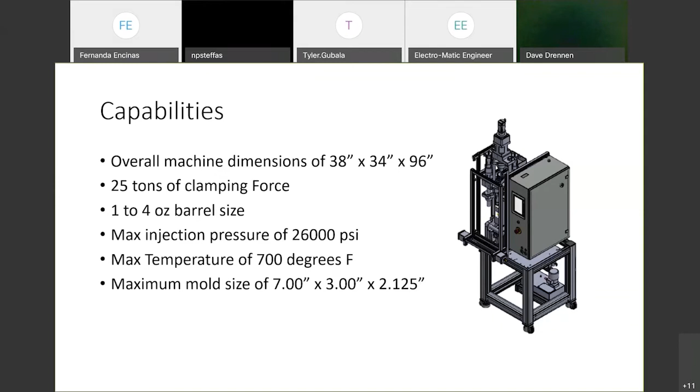So inside the Model 55E, it is controlled by a Siemens S7 1500 PLC with a TP900 comfort panel. It also has 4 S210 drives and then also 4 S1 FK2 servo motors, which drive all 4 axes of the machine.

So that's a good little explanation of our Model 55E injection molding machine. And if you have any other questions, you can feel free to reach out to me here at Electro Matic. And now I'm going to hand it back to Dave.

So, the idea of virtual commissioning, how it's used, it uses software to evaluate the machine function by virtual simulation of all levels, typically without hardware, and that's the goal.

There are several levels that need to be simulated in order to create the digital twin of the machine. First, we need a way to simulate the PLC controller. We also need a way to simulate the HMI or operator interface. And we need to simulate the interaction between the PLC controller and the mechatronics of the machine.

Once you have these simulation capabilities in place, you can realize the benefits of virtual commissioning. Now, some of the core benefits would be to lower the risk of real commissioning by eliminating errors virtually. Most machine commissioning is done with the trial and error method, in which case leads to broken parts and other costly damages. And it would be reassuring to know that deploying your PLC program to the real machine would not cause malfunction.

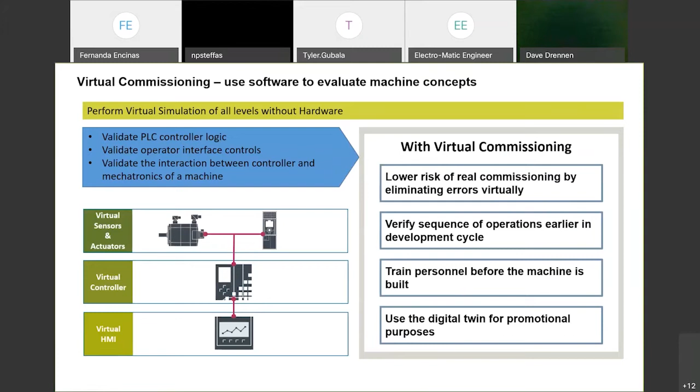First thing, we need a way to simulate our PLC program, and with that we use a product called PLC Sim Advanced. This is a Siemens piece of software, and what it does is it basically emulates the S7 1500 controller, essentially emulating the real-world controller in just about every way. Here we'll download our PLC program to the virtual controller. It has all the same functionality, like I said, as the S7 1500 does.

Also, here it's able to handle co-simulation using an application interface. So if you wanted to have your own Visual Basic program or C++ program or whatever you have, you can actually tie into the application interface and be able to model the behavior of your I/O.

Also, with the PLC Sim Advanced, I think you can run up to about 16 instances on a single computer. So you can essentially have 16 controllers running virtually and sort of virtually network them together if you had a complex network. You can also tie multiple PCs together over Ethernet. So you could have one virtual controller running on one PC, another virtual controller running on another one, and tie them together over a physical Ethernet network and exchange data, interlock data, just the way your machine would be set up.

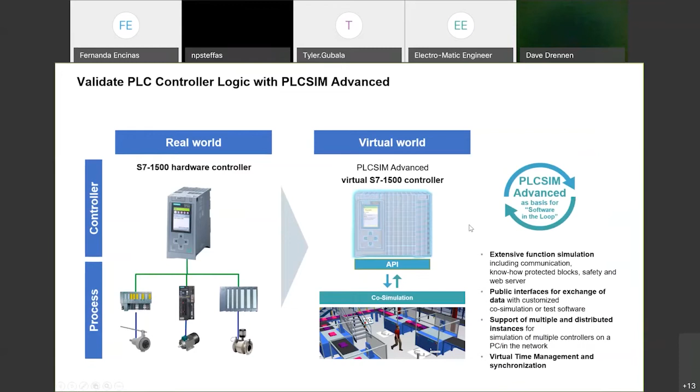The next thing would be the validation of visualization. This is something that can be easily started within the TIA portal project. So if you have a comfort panel or some type of Siemens HMI or a PC-based runtime HMI, it's very easy to start the simulation within TIA portal.

Just a matter of clicking on the simulation button on the top ribbon bar within the TIA portal application. So together with that and the PLC Sim Advanced software, you can run the HMI just as if it's a real world HMI on the machine. It will connect to the S7 1500 virtual controller in just the same way it connects to the real world PLC. It will exchange the same type of data - I/O data, data blocks, memory flags, timers, and counters. It works just the exact same way.

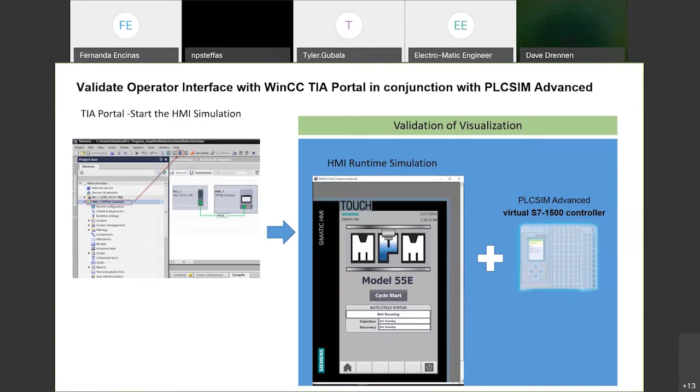The next piece of software is used to validate the mechatronics of the machine, and this is the NX MCD software. We'll use this to create the kinematics of the machine by using your 3D model, and here we can animate the motion of the various parts and assemblies with multi-body physics.

You can simulate the flow of material through the machine. You can check for collisions between machine parts and material. This is all accomplished by using virtual sensors and actuators. All the animation is controlled and monitored by the PLC logic running in the virtual controller.

So on the video that you see here, we have a sort of pick and place machine, and these animations are basically created by various types of animation joints that you create within the MCD package, applied to these various assemblies. You see here a sliding joint for the horizontal axis and vertical axis of the pick and place grabber bars. You also see a hinge joint on the base that's holding the parts onto which the gears are being placed. So all this is being controlled by the PLC directly.

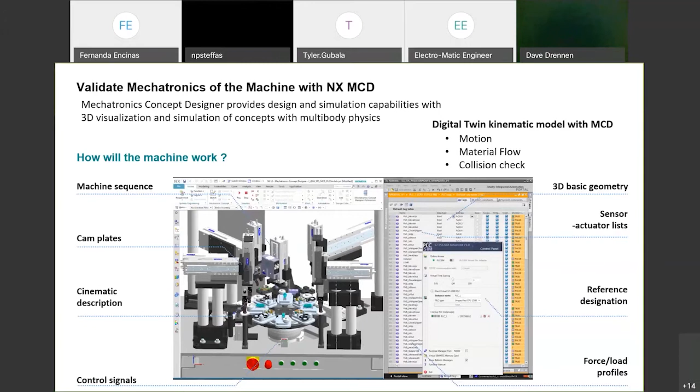So how does all this come together? There's two main solutions: we have something called hardware in the loop and software in the loop.

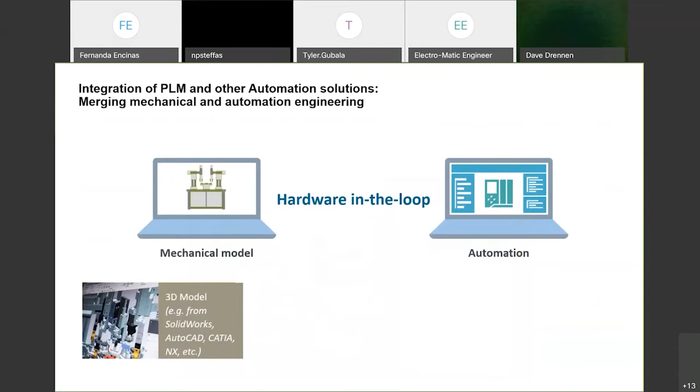Hardware in the loop allows us to take our 3D model and bring it in from NX. We can also bring it in from SolidWorks, AutoCAD, CATIA, and some other files we'll take a look at later, and bring this into the NX Mechatronics Concept Designer. Hardware in the loop allows us to tie the NX MCD software package directly to third-party PLC equipment, such as Rockwell, ControlLogix, maybe Omron, Mitsubishi, really just about any PLC.

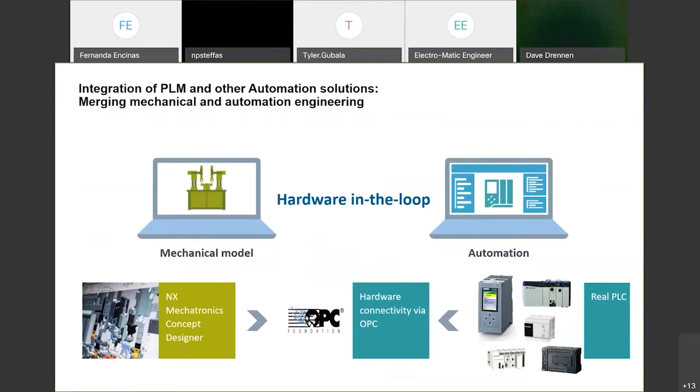And we do that with OPC connectivity. OPC has been around a very long time in the industry, and basically if you have an OPC server, that OPC server has a front-end driver for your PLC. You can bring that data into the OPC server, and the NX Mechatronics Concept Designer becomes an OPC client, either an OPC DA client for data access, or an OPC UA client for unified architecture.

But today I want to focus on the software in the loop solution, which does not use any hardware at all. In this case here, we'll do the same thing - we'll bring our 3D model in from SolidWorks, AutoCAD, CATIA, NX, various 3D applications. We can bring the model into NX MCD.

We can use the Totally Integrated Automation Portal along with Step 7 for programming the PLC and WinCC for programming the HMI. Those will be connected to the PLC Sim Advanced, so both packages will communicate to each other through PLC Sim Advanced. PLC Sim Advanced has a direct coupled, low latency connection directly to the NX MCD package, communicating in the sub-millisecond range. It uses something called a soft bus architecture, which is more like an internal communication bus right within the PC itself.

This is how we combine all these and realize the digital twin.

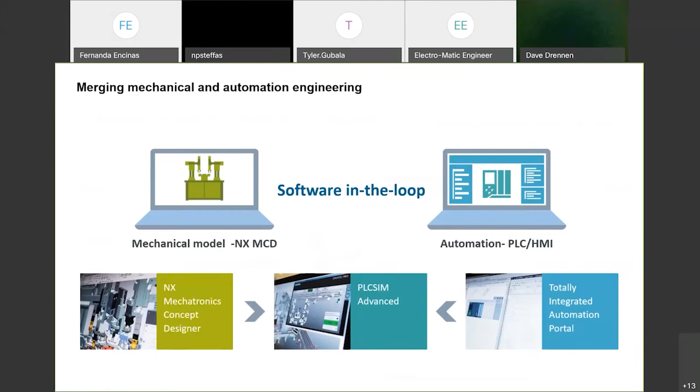Just to add another package, this is an optional package called SIMIT. SIMIT allows us to model the I/O behavior, maybe things such as temperature, pressure - we can model those particular values, and it provides a co-simulation to the NX MCD package. If you have drives, variable frequency drives, servo drives, SIMIT will allow you to emulate the servo drive virtually. It allows you to pass the telegram information that you'd normally find between your controller and the drive, completely virtually between the PLC Sim Advanced and the SIMIT software as well. So this is an optional package that can be added in if you have certain functionality that you want to emulate on the machine.

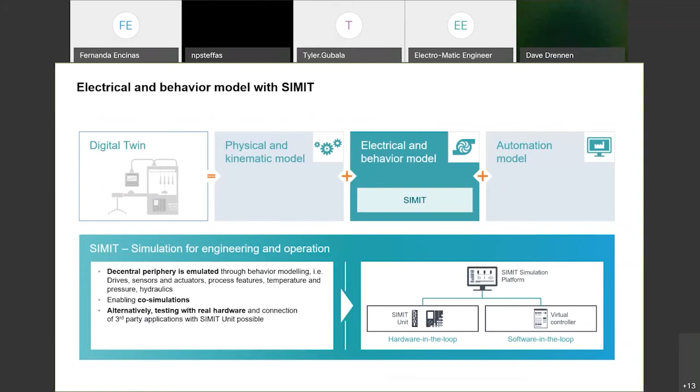What are the reasons for the digital twin? At least in our perspective, in our MPM machine, some of the core reasons we looked at is we want to be able to train our development team on machine function. We also want to be able to use it as a training tool to help new hire engineers and show them automation and controls, get them to start programming and understand how these products relate to each other. We also want to be able to verify PLC logic changes.

We want to be able to verify, well, if the customer needs changes, we make those changes virtually, test out the equipment, and make sure it runs properly. We also want to be able to verify the safety of the machine. Two aspects to safety: I can verify e-stops, any kind of safety logic, safety circuitry, ProfiSafe communications to the drives - all that can be verified virtually.

Also, this particular machine is dealing with very large pressures and very large forces between metal parts, high torques. We have servo drives running through reduction gearboxes that can generate tremendous amounts of torque and pressure. You want to make sure that you're not applying too much pressure, which could cause parts to break.

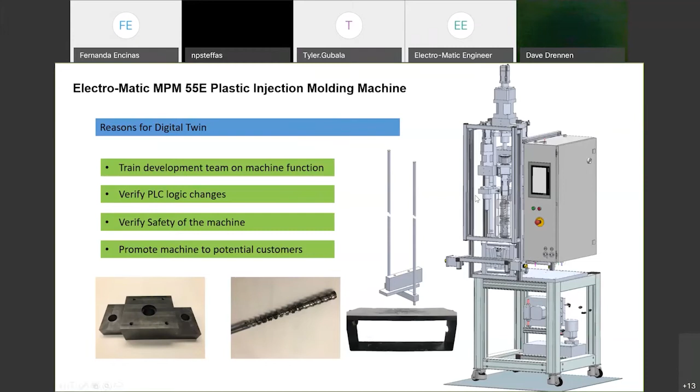I'd like to get into the MPM55 componentry and some of the assemblies here that we're going to be animating. This is just a first pass digital twin simulation that we looked at. Right now, we're just going to model the basic simulation of this machine, and eventually we're going to incorporate more of the logic in and get ourselves a true digital twin. But for now, what we wanted to do is just animate a few of these parts.

The first is the carriage axis. That's a single axis servo motor running through a reduction gear. It moves the whole assembly up and down, and basically what it does is move the injector nozzle down to the mold and get it ready for injection of plastic. We also have the injector itself.

It consists of two individual servo axes running through reduction gearboxes with two ball screws. The injector axis will push the hot plastic through the barrel into the mold. After that process has finished, we need to recharge the barrel with new plastic, so we also have the injector screw axis on here. As the injector retracts, the screw turns on and fills the barrel with new plastic pellets from the hopper.

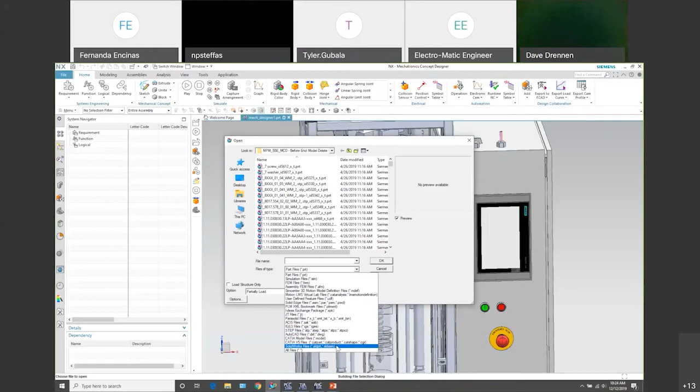The SolidWorks file, just to mention, SolidWorks uses the same Parasolid kernel as Siemens does, so it's actually licensed by Siemens to SolidWorks. When you use SolidWorks, you're using a piece of Siemens technology in that, so it imports directly in without issue.

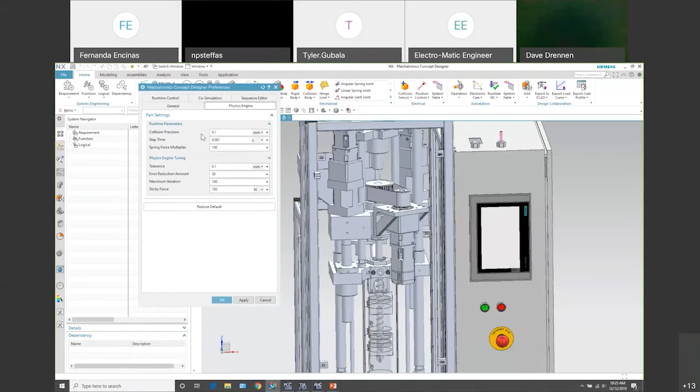Some of the things we have on our toolbar here include detailed information about the Mechatronics Concept Designer. We have some default values here - we can adjust the acceleration due to gravity, change the direction of gravity, and look at different coefficients of friction parameters, linear damping, angular damping. Our physics engine also lets us fine-tune some of the runtime parameters for collisions and the physics engine time slice sampling.

At the top main tool ribbon here, we have our mechanical group. Here we have something called a rigid body, object source, object sink - these are some of the few that we're going to be using in the MPM machine. We have collision bodies, transport surfaces, using collision bodies in our application. We have different types of joints that can be applied to the parts or assemblies, such as a hinge joint which gives you a 360-degree rotation, sliding joints, cylindrical joints, screw joints, and so forth.

From our electrical group, we can define different sensors to detect the position of parts or when parts collide with each other. We have position control and speed control - these are applied to specific joints, so we can provide a position value to a certain joint and have it move to that position, or change the speed or velocity of some parts. We also have force and torque control, which you can apply to various parts to simulate that particular function.

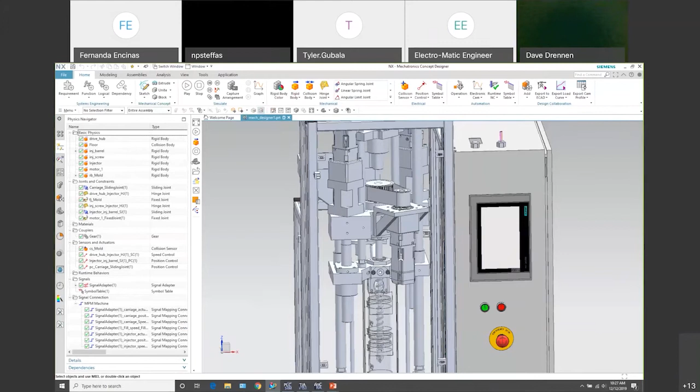Over on the left, we have our resource toolbar. Our physics navigator is used to manage all of our animations for the model. We have a physics group, joints and constraints, materials, couplers, sensors and actuators, runtime behavior, signals, and signal connections.

We have a runtime inspector, which is used during simulation of the model. We can add in various parts, joints, position or control information, and monitor that information as it's running. We can also change the values here - Boolean type values, positions or velocities as integers or double integers. We can look at all that information here.

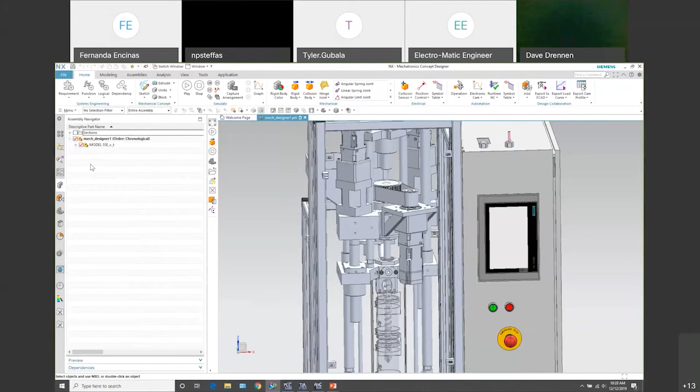We have an assembly navigator, which shows us all the various parts that we have on our model. Here we can turn parts on and off, hide them if we wish, break them out and look at them.

And we also have a sequence editor. The sequence editor allows us to actually animate the model without any PLC connection here, so we can animate the model and create a step sequence of the various assemblies and how we want them to react.

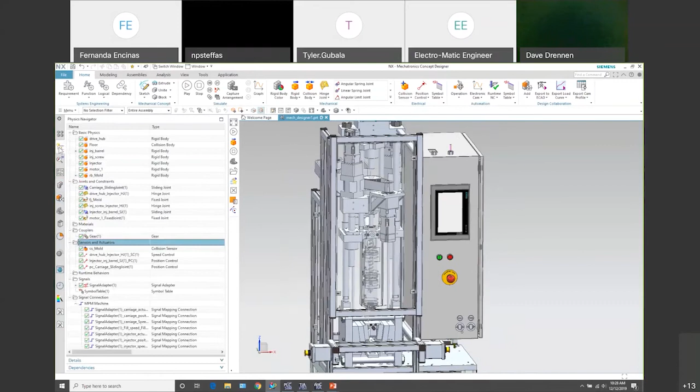Okay, so let's take a look at our physics navigator. We'll look at some of the assemblies that we're animating here in the MPM. The three main assemblies are the injection barrel, which is part of the carriage assembly - as you see it here in orange, this is a group of parts that we created when we created what we call the rigid body. When we create the rigid body, we bring up that function and select various parts that we want to be part of that particular rigid body.

The rigid body allows us to define a mass or weight to these objects, or it can be automatic detection based on the dimensions of the part and the type of material being used for that part.

Once you've defined the rigid body and defined the mass, what you're doing is telling it to react to gravity. So it's going to respond to gravity just the way any normal item would in everyday use.

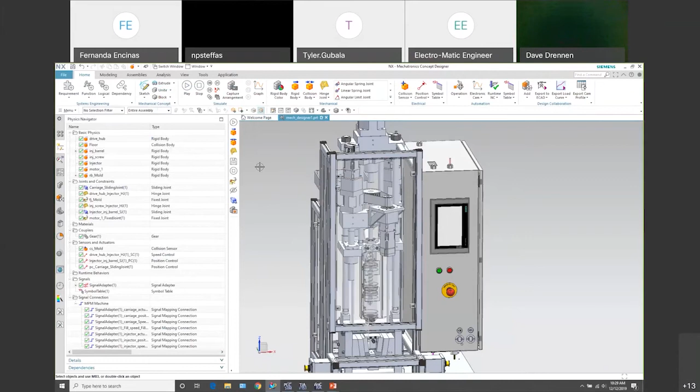We also have our injector screw here in orange. That's going to be used to recharge the barrel with fresh plastic, and it's also going to be used to inject the plastic into the mold. Then we have our injector assembly, which has the two servo drives.

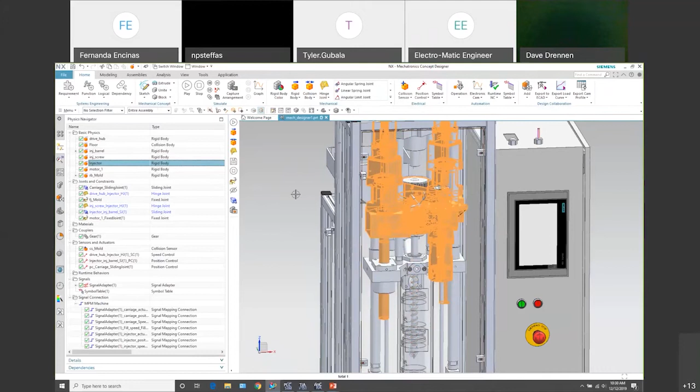That's going to be moving also to inject the plastic in utilization with the injector screw. Joints and constraints: we have different types of joints that we've applied to these assemblies. In our particular case, we use a carriage sliding joint. Let's take a look at that. We have the carriage assembly here in orange.

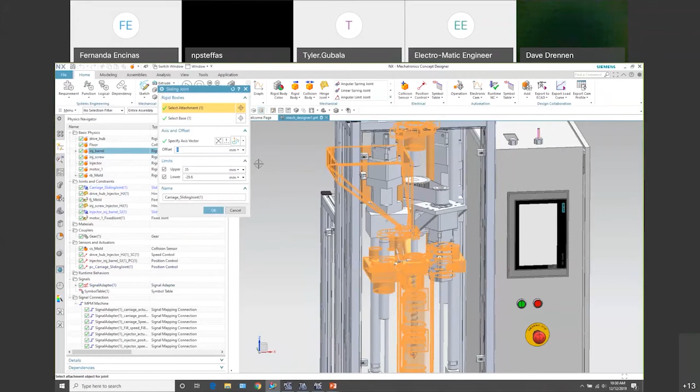That is going to be a sliding joint, controlled by the PLC directly through variables that we're passing with the data block.

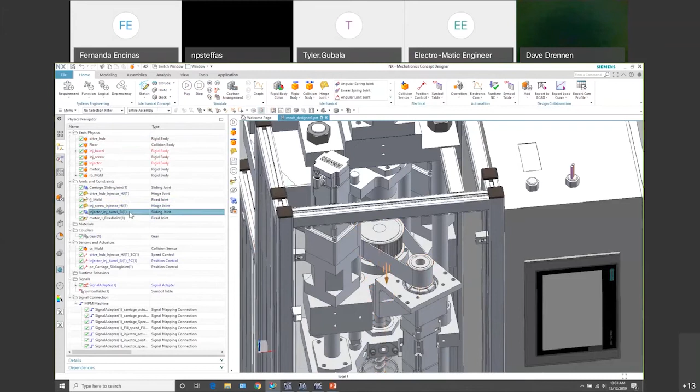We also have the drive hub injector, and that is the main servo shaft with its pulley. We also have the actual injector assembly itself. That's going to be a hinge joint because it's spinning between 0 and 360 degrees. And we have a sliding joint for the injector barrel itself.

So we have these joints defined between the assemblies. Now we have to provide a way to control these joints and be able to tell it what's the velocity of these objects and what position we want them to move to.

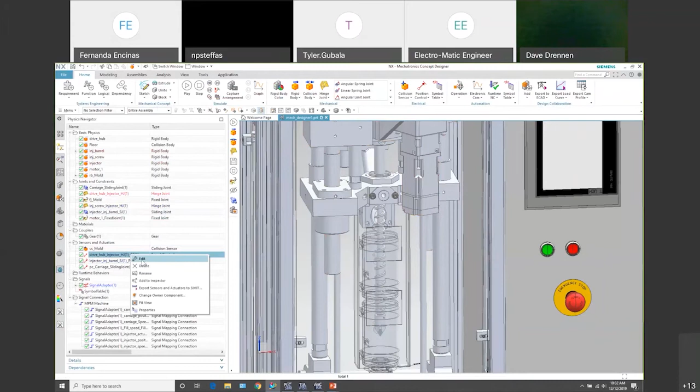So we have something called a speed control, and the speed control is going to be used to change the speed of our servo drive. The speed is going to be directly referenced to a tag in the PLC. We're going to have logic running to that tag, telling it what velocity to spin this shaft at.

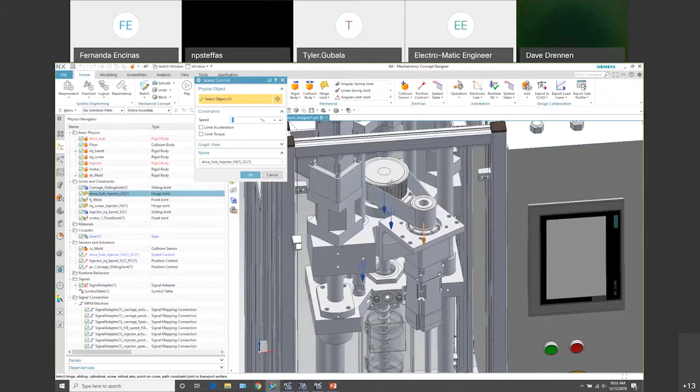Now you can see here that we've coupled the servo drive shaft over to the injector screw shaft through a cog belt. So those two shafts are coupled with what we call a coupling gear, which allows us to specify a gear ratio between these two. We went from 1 to 0.492, which was the gear ratio we used.

So the master is actually the servo drive shaft, and the slave shaft is going to be the screw injector shaft. We specify those two just by clicking on these particular assemblies.

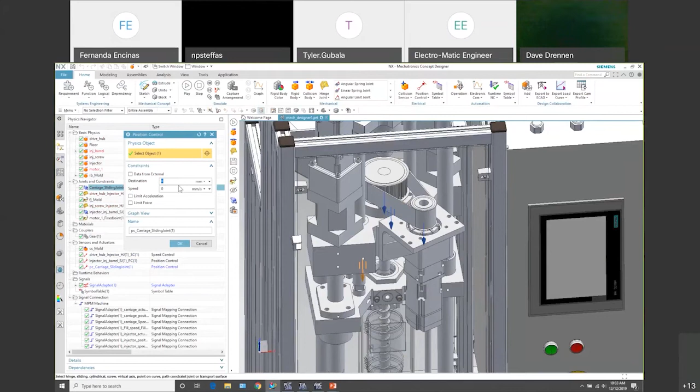Our carriage sliding joint is controlled through a position control as well, and that's also handled by the PLC logic. So we're going to map a tag directly to the position that we want the carriage to move to.

So we've defined our joints and constraints between the assemblies, and we've specified the methods for how we're going to control those joints. Next, we need to take a look at the signals.

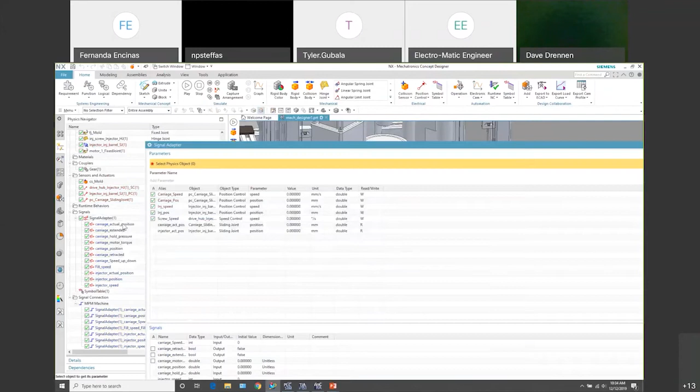What we do there is create something called a signal adapter. The signal adapter is essentially our PLC signals that we'd like to use and connect with the NX MCD package. Let's take a look at the signal adapter. There are going to be three main sections of the signal adapter.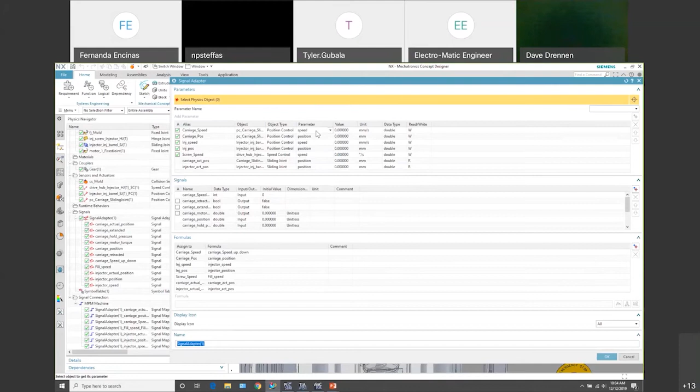Let's get this resized. In the first section at the top, we're going to define local tag names that the MCD package is going to use, and it's going to be mapped to specific parameters of our sensors and actuator section here.

So for instance, we have a carriage speed right here. This is the position control for a carriage sliding joint, and it's a speed parameter. Once we click on the carriage sliding joint actuator, over here in the right-hand corner, we have various parameters that we are able to control or read. It defines it right here.

So in this case, you click on speed and then add that to the list, and give it a specific alias name, or what I call a local tag name.

In the middle here, we have our actual PLC signals. In our case, we're going to be using a data block. I've created a data block in the PLC logic that's going to be used for nothing else except passing, reading, and writing MCD control signals. So I've created these few tags in the PLC: I want to be able to control the speed of the carriage, and I want to know when it's retracted or extended.

I want to be able to monitor the motor torque, carriage position, hold pressure, injector speed, injector position, fill speed. I want to be able to read back from the NX MCD package what the actual carriage position is and what the actual injector position is. I'll be using a few of these in the demo here that we're going to run in a minute.

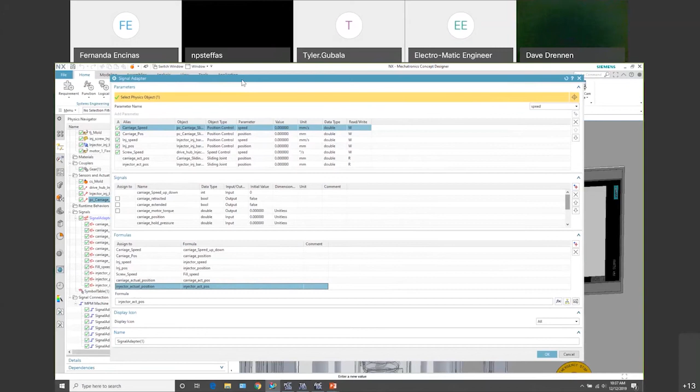In order to get the PLC data in, be able to map these tags and be able to create the signal adapter, you have to make a signal connection first. We have a signal connection section down here. This is basically showing the different tags that I have selected for mapping.

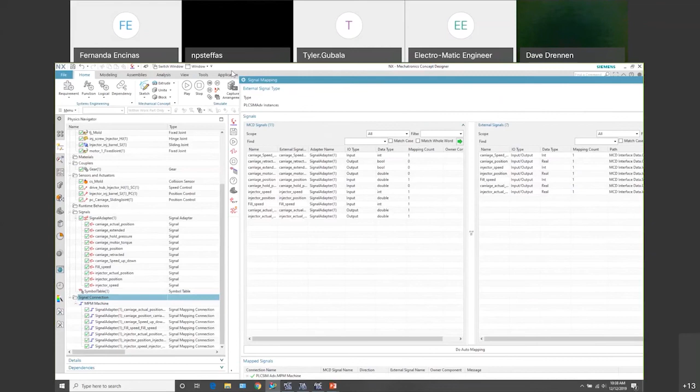If you take a little closer look at this, signal mapping is basically a collection of the tags that I wish to use for this particular project. So over here on the right, these are the various external signals that I have mapped from the PLC and are brought in, now making them available to use for the signal adapter.

And what we basically do is we create this signal connection. What we have is a signal connection here to our MPM machine, which essentially is our PLC Sim Advanced software running our instance of the MPM machine, which is basically our S7 1500 controller.

This right now is running. The program is downloaded to it. What I can do is I can define what type of information that I want to read or write to in the PLC.

Over here we have an option list. Here we can read our I/O, memory bits, inputs outputs, memory bits, counters, timers, a combination of these types of variables. Here we have data blocks, I/O and data blocks, and so forth.

We can pick something specific that we'd like to read here. We can also go ahead and filter what specific data blocks or I/O that we'd like to bring in. Once you decided what you want to use, you update the tags.

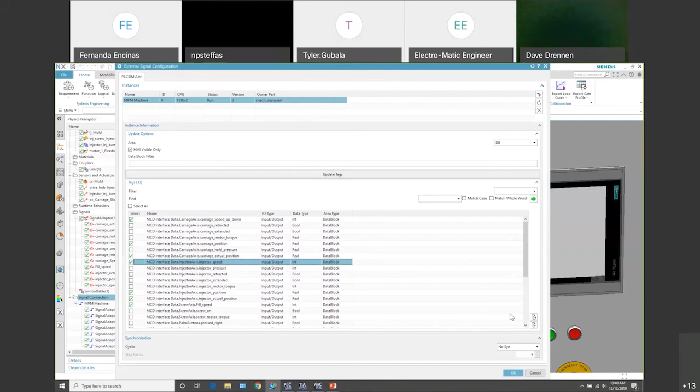You go back to the signal mapping chart. They'll appear up over here. And basically, you can just click on these and you can create the pair signal, which basically just adds these to the signal adapter.

That's our MCD signals that we have over here on the left. And down here, it shows the actual mapping of your signals and how they're set up. You have read signals, you have write signals, defined by the arrow that you see here.

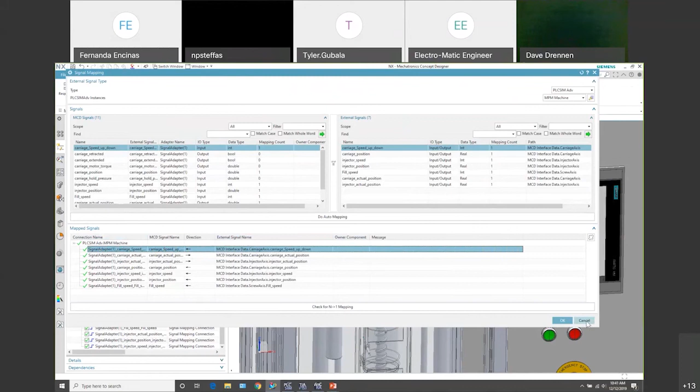Other ways of doing this: you can also export a tag database directly from the TIA Portal Step 7 package into an Excel file, and import the Excel file in, which will help create the signal adapter for you without going through some of the steps I just showed you. So there are a couple different ways of getting the data in and mapped correctly.

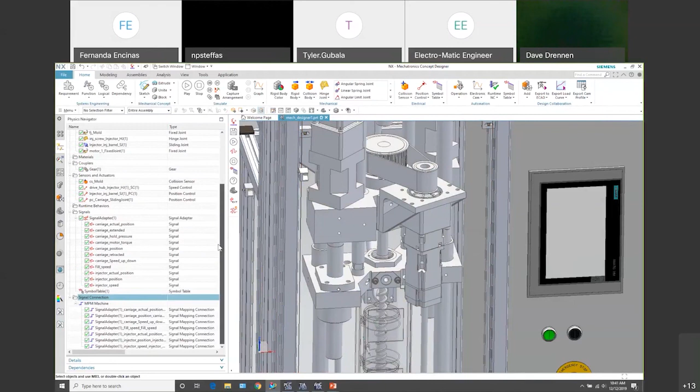Let's go ahead and run the simulation of what we have so far. I have running right now the PLCSIM Advanced software, and I also have some logic. In this particular case, I made an S7 Graph package, based on the GRAFCET language, which is a step transition software package. This allows us to provide the main sequence of operations. Each step basically sets a flag bit in the controller, and then from there I have additional logic that reads that flag and does further processing. Once the processing occurs for each section of the machine, it moves on to the next step.

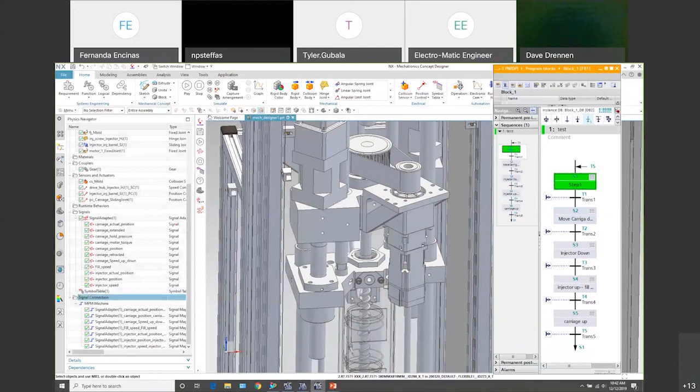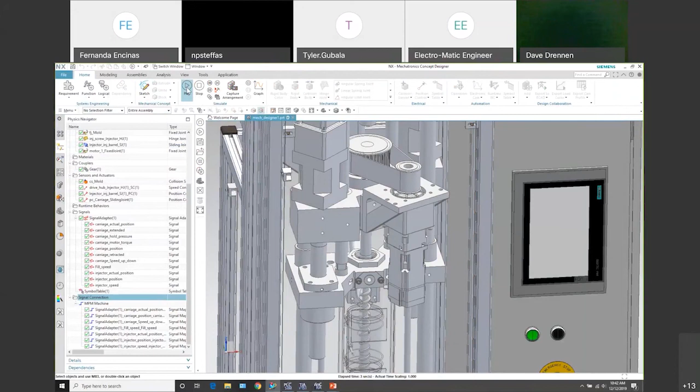And we also have our HMI. In this particular case, I have an HMI running, and I just have a simple cycle start button. I want to start the sequence of operations for the machine. So right now, I'm going to go ahead and start the simulation in the NX MCD software. Let me zoom out here a little bit. So we have our HMI running, we have our PLC logic running, and hopefully we can start the cycle.

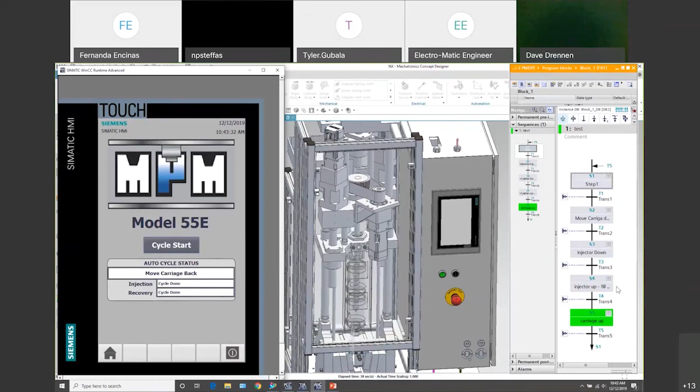You can see how the step transition graph set coincides with the animation of the model. What you're seeing on your WebEx screen is probably updating about 1 frame per second, so it might look a little choppy, but if I zoom in a little closer here and run it again, we can get a more detailed view of this.

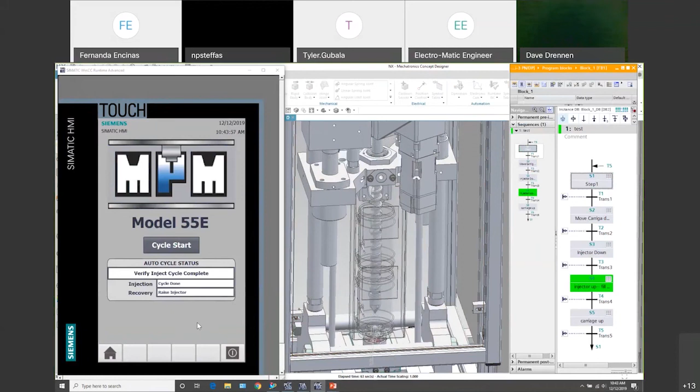So you can see how I've basically emulated the cycle of operation of the machine. I've been able to incorporate logic.

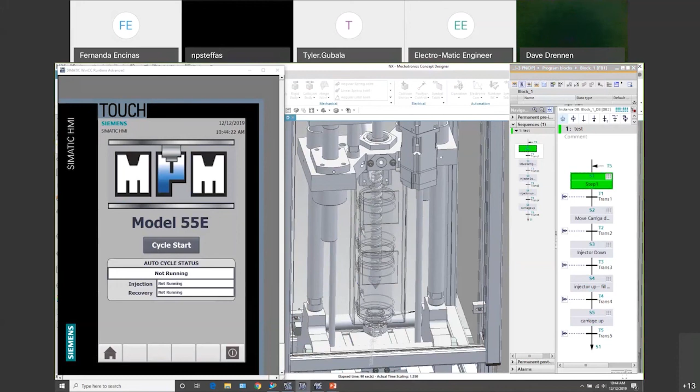One more thing, I'm getting close to our time frame here, so let me just show you one more thing on the logic part. I have some additional carriage logic that shows you how I actually read the position that's being fed back from the NX MCD software into my data block. Here we have our MCD interface, which is our carriage axis, and here I'm reading the actual position of the carriage. I'm using that information to tell me when I've finished the movements and to follow with the next sequence of operations. So when I start the cycle, you can see the values change at the top. It goes between 0 and 33 millimeters is the movement.

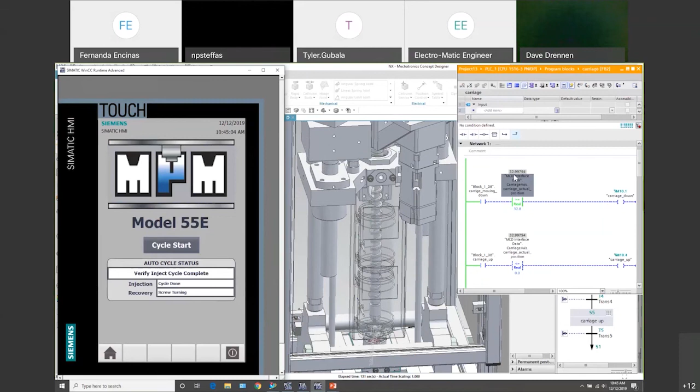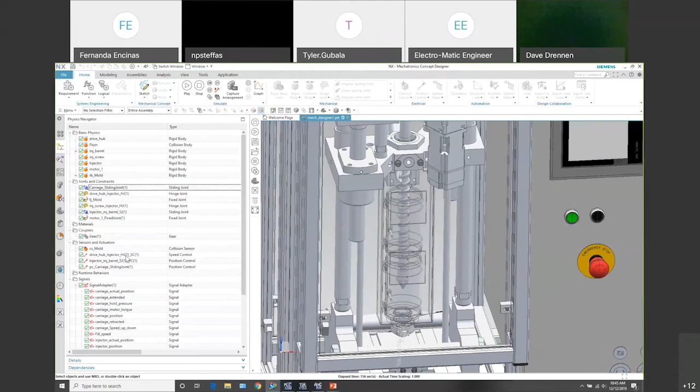So here I'm writing information and reading information. You can read all different types of values. To take a look at this, we could monitor, let's say, our carriage sliding joint. I want to show you the runtime inspector here. Let's stop this for a second.

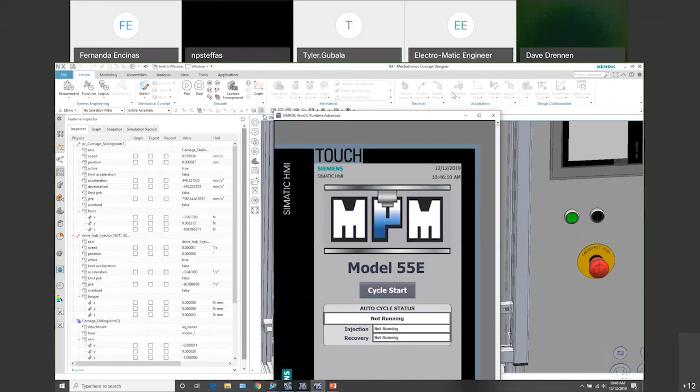So here we have our runtime inspector. I've added a few of the sliding joints, the position control information, to the runtime inspector. We'll go ahead and start the simulation. You should be able to see some values change here. We'll run it one more time. Here's the speed of the carriage axis, and there is the position. This will start when the carriage retracts, and you can see it changing. So you could actually run the entire animation model without the PLC connector. You can test all this out before you connect the signals.